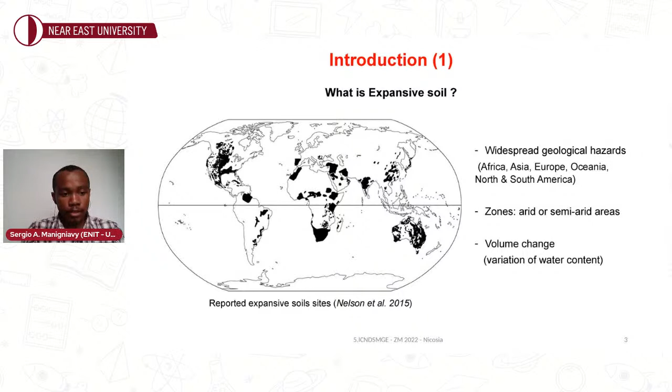Without further ado, what is expansive soil? It is a widespread geological and natural hazard present on six continents across the world. We find this kind of soil in arid or semi-arid areas. Its volume changes with variation in water content, which is defined such that this soil will shrink in a drying environment, and when it is wetting, it will swell.

The way it shrinks is characterized either by human activity or by natural ways, like evapotranspiration, water adsorption, or evaporation. That's why Richard Jones and Holtz called this kind of soil a hidden disaster. The clay mineral responsible for this phenomenon, the shrink-swell behavior, is from the smectite group, in particular montmorillonite. Shrink-swell behavior of soil causes damages,

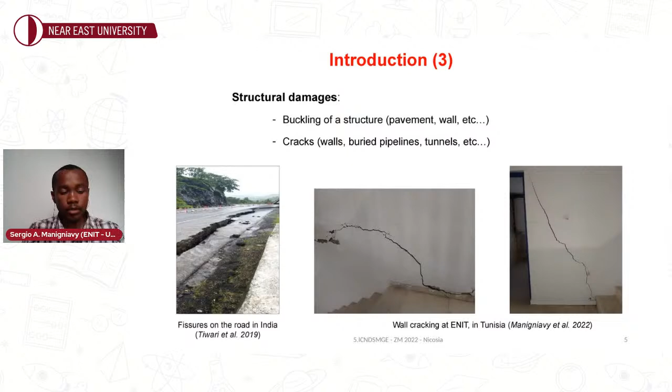such as buckling of structures, walls, pavement, or roads, or railways. It can also present as cracks on roads, or in walls or retaining walls. Damages lead to costs. Annually, the extra costs related to repairing and maintenance are more than $18 billion, and due to all this damage, the lifetime of our structures is reduced.

And that means we don't make a good investment. So we have a question, and us engineers, we should respond to this question: is there a universal method to characterize expansive soil?

I read a lot of papers, literature, and so on. I don't find a universal method. That's why we proposed a characterization method based on oedometer test results, more precisely compression indexes, abbreviated by CC, and swelling indexes CS.

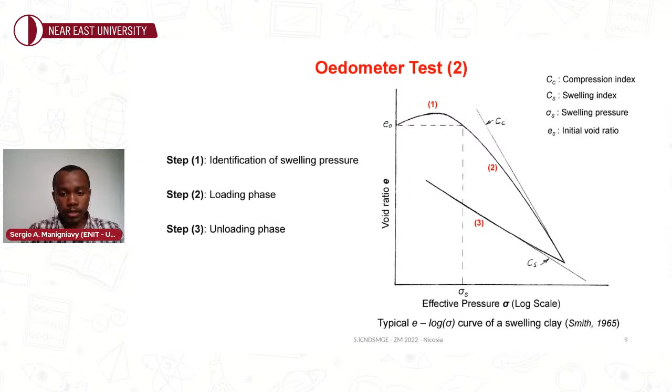we see the slope of the loading phase is the compression index, and the slope of the unloading phase is the swelling index. The point corresponding to the initial void ratio, where we load it in the loading phase, gives us the swelling pressure. That way, we characterize our expansive soil using the CC to CS ratio.

We have collected 39 data points, which come from North America and North Africa, more precisely from Tunisia, Algeria, United States, and Canada. All of those samples are clay soil. We have 28 samples from Tunisia, 5 each from Canada and Algeria, and 1 from USA.

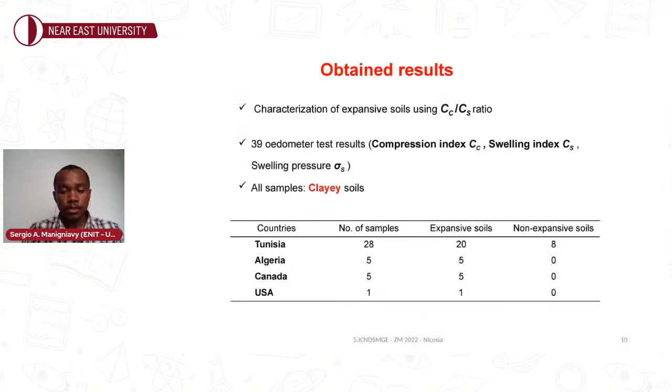And 8 of them are non-expansive clay, only 8. We obtained this graph. We observe that for the non-expansive soil, there are in that zone where CC to CS is higher than 10. And for CC to CS higher than 15, we observe that the swelling pressures are practically equal to 0. And we remark further, as CC to CS increases, the swelling pressure decreases.

In that zone, all points you find there are expansive soil, like this one. So this method, called CC to CS ratio, is an indicator of volume change, quantifying the degree of compression of soil and its swelling. As I said earlier, when CC to CS is higher than 15, the swelling pressure is practically equal to 0.

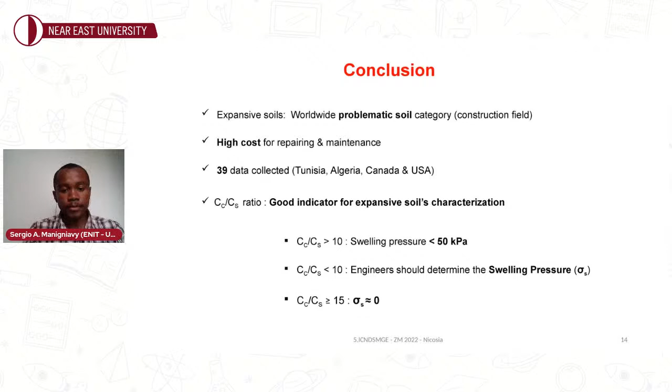When Cc to Cs is higher than 10, the swelling pressure is lower than 50 kilopascal, which is approved by other researchers. And when Cc to Cs is lower than 10, we should not underestimate the swelling pressure of that soil, and we should determine its swelling pressure. When Cc to Cs is higher than or equal to 15, the swelling pressure is practically equal to 0.

Our next step is to collect a lot more data to confirm this finding method, the Cc to Cs ratio, and also to refine the degree of swelling potential. With a large amount of data from across the world, we can establish a curve fit to determine or predict swelling pressure for clay soil. I don't mean all soil, I mean all clay soil.

The next and final step of our study is to optimize our mitigation method, which is the use of granular material as an interface between our foundation and the swelling soil. Thank you for your attention. If you have a question, the floor is yours.

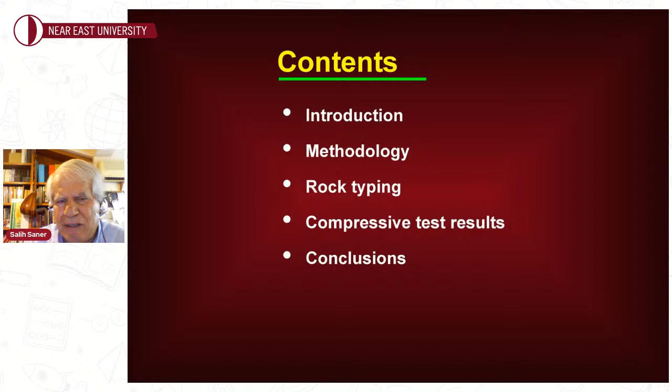Not only in Cyprus, but in many Mediterranean countries, these rocks of Miocene age are available and being used. The building was built by the British colonial administration in 1937, and it was burned out and collapsed in 1974 after a fire. The rock is called commercially sarı taş, which means yellow stone.

It is yellow, as you see. And everywhere, even engineers, always — it's bothering me — engineers are calling it sandstone, sandstone, sandstone. It is not sandstone. Yes, it is made of sand-sized particles cemented with calcium carbonate, but it is limestone. This is one issue I wanted to highlight for everybody. It is limestone. In geology, we have to respect other sciences.

It is limestone, granular limestone, also called calcarenite due to its grain size. If the grains are sand-sized, we call it calcarenite, a grainy stone—this terminology is commonly used. We have many castles, towers, and the walls surrounding Famagusta and Nicosia, Lefkosia, and many historical buildings made of this stone.

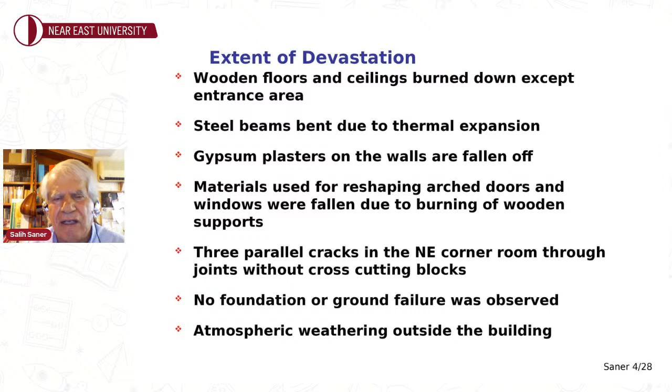We saw three parallel cracks only in the entire building, and no failure in the foundation and ground. We also saw some alteration in the rocks.

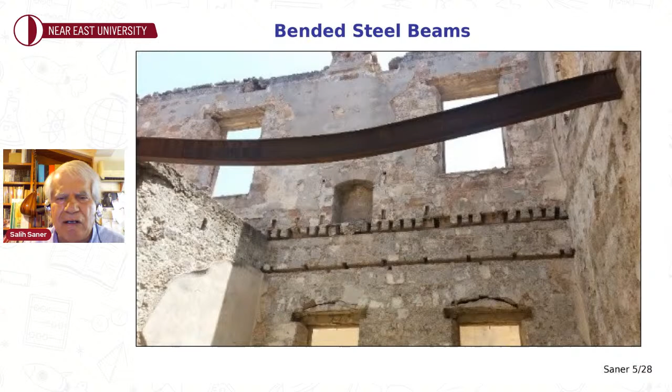Now this is the view of the inside. You see the rocks—they seem very strong, the beam is bent, and there are fractures, but they don't cross-cut the blocks. They go through the joints between rocks.

Originally there were arches at the top of the doors and windows, but in a renovation stage they made it rectangular, canceling the arch, so that material was supported by wooden supports. Those supports also burned out—but look at how beautiful the rock is.

Rectangular blocks are used outside the building as decorative material, and nothing happened to them—they are perfectly preserved as original.

In the southern front of the building, 75 to 80 centimeters up from the bottom section, the yellow stones are altered—we have alteration, atmospheric alteration, weathering.

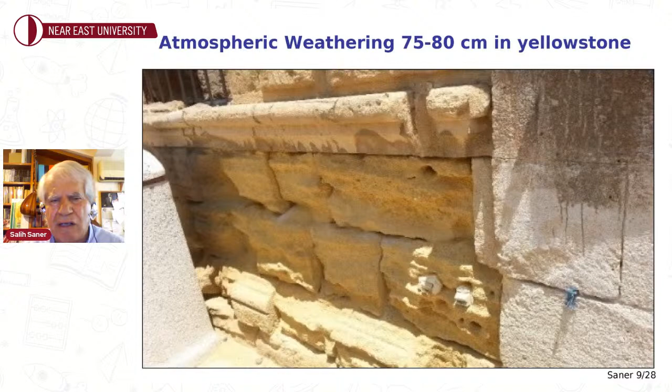We asked what the differences are between the rocks used that may mainly affect their strength today. After our study, we took 40 samples and divided them into three groups.

One is homogeneous yellow stone, calcarenite; another is fine-grained; and another is coarse-grained, granular, with smaller grains than the first granular type. The third one has big grains leached out and dissolved, so we call this one vuggy.

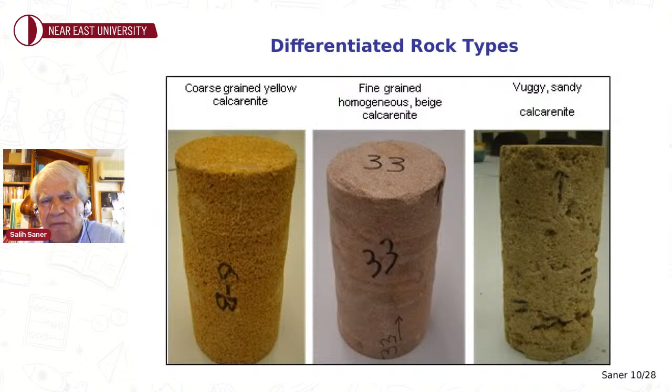So in the same building, and these materials are also used in building the walls surrounding the cities. This is the vuggy sandy sample—three different facies.

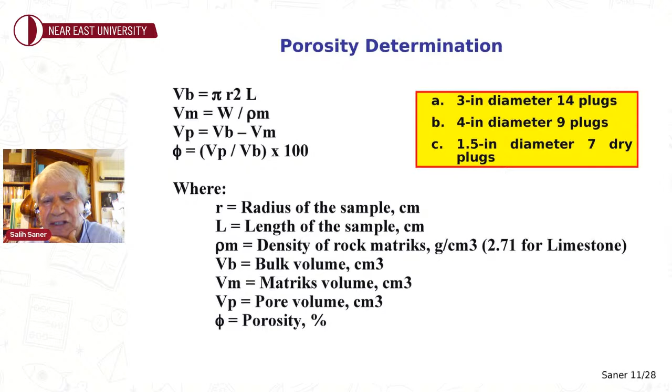When we got the samples, we determined porosity. Since it is made of 100% limestone using 2.71 matrix density, we calculated porosities in all samples.

We used a machine to run uniaxial compression tests, and after that we took the results.

So we have fine-grained, coarse-grained, and vuggy—three different porosities. The porosities are given with average, maximum, and minimum values.

The average porosity, as you see here, is 37%, very high. The maximum goes up to 50% across all the rocks, and the highest is in the coarse type.

37% for vuggy, and for coarse samples 43%, fine-grained 27%. The corresponding compressive strengths are: this one is 11, this is 4, and this one is 4.15. The lowest is vuggy, on average.

For the groups, we checked fine-grained, coarse-grained, vuggy, and overall results. We found that vuggy has the lowest strength, and fine calcarenite has the highest strength.

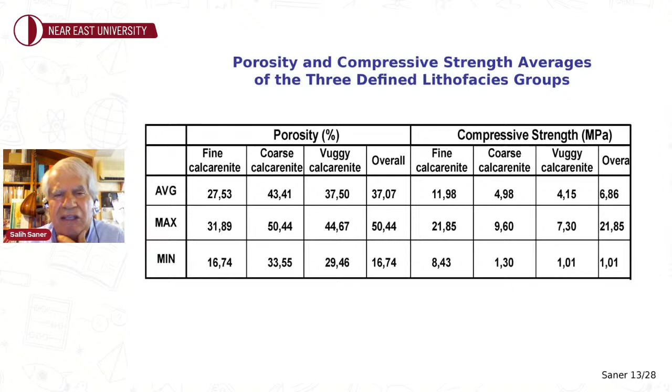So when selecting the rock, we can determine which one is better for construction. After that, we asked: is it strong enough today or not? We try to interpret it.

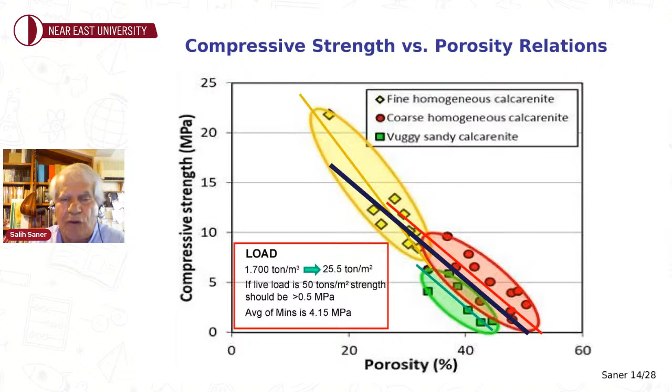Of course, first we have to observe, then interpret, and then do whatever is needed.

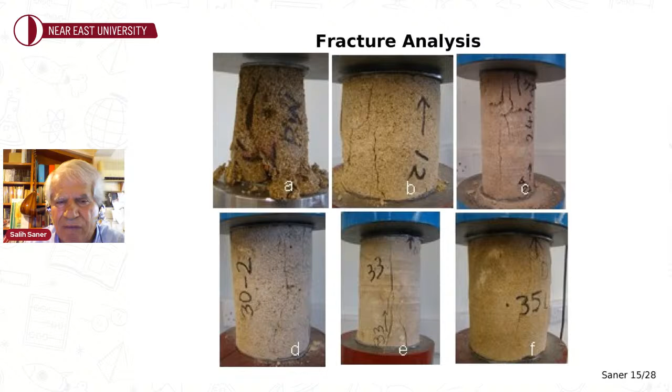We also checked fracture types—what kind of fractures are happening. This one is the granular, calcarenite, homogeneous one—you see it disintegrates under pressure. This one shows longitudinal fractures, and we are getting much better fractures here. So the brittle ones, the fine-grained ones, are more brittle with longitudinal fractures.

And I wanted to highlight the importance of rock type in rock mechanics and put the observations for everybody here. What I mean is, we have to care about the mineralogy also when we are doing this kind of work. This is what I want to say.

Thank you very much, Professor Saner, for your nice presentation. I was wondering if you have any data about the weathering process, like when they are exposed to some weathering factors. Is there any information about their properties some years ago versus their current properties, so that we can see the effect of weathering, if such data is available?

When they were built in 1937, they were perfectly cut. This is not only in this building, but many buildings made from this kind of rock have a weathering effect, with cavities occurring outside. This one was built in 1937, and today you are seeing the surface and our observations. This is at the lowest part, the 75 centimeter part, and why it is not available in the other corners, only in the southern wall, we wanted to interpret it.

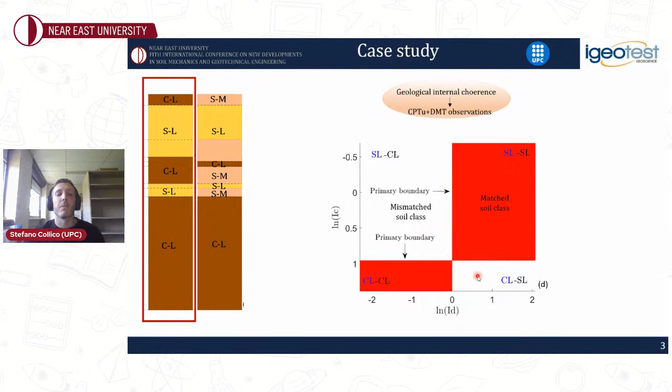So where we have a disagreement between CPTU classification and DMT classification, after having defined this joint chart, we also need to treat a little bit the DMT data, since the amount of data that we collect during a CPT test or during a DMT test is rather different.

I will not enter into the detail - there are several approaches to do that. I will just present this case, in which we are considering a spline interpolation of the DMT data, not just in order to have the same amount of data as CPT.

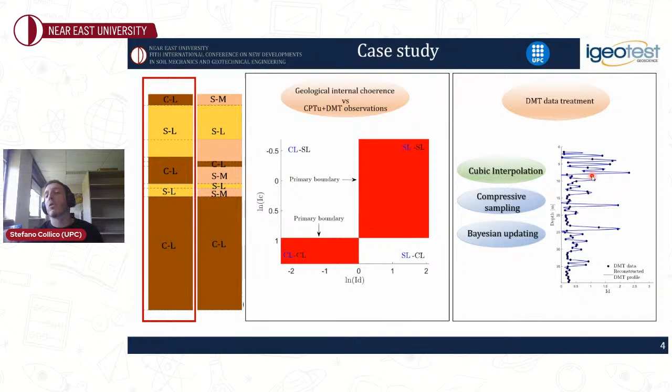So having defined all these tools, we can now check the coherence of a geological interpretation. We plot for each soil geological layer the CPTU and DMT data. As you can see, for the clay-like unit, reported by 1, 3, and 5 in terms of CPT and DMT data, there is a sort of coherence with respect to geological description, since all the data fall within the matched clay-like class.

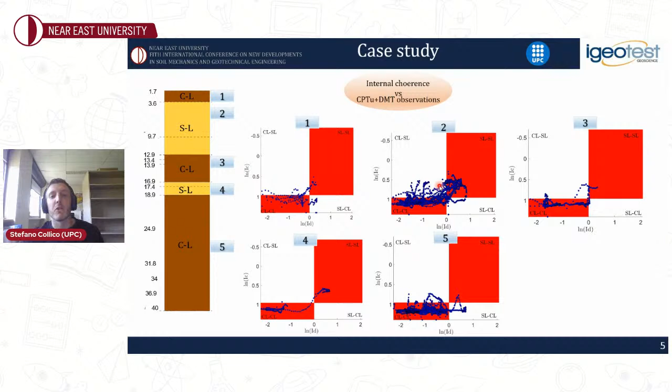On the other hand, if you analyze the CPTU and DMT data for the sand-like unit, you can see that, especially for this layer number 2, the data spread across the soil behavior type chart. So the question that arises is quite spontaneous.

How can we communicate this layer delineation to other parties involved in the design process? How can we justify the fact that we are neglecting, for instance, clay layers within this sand-like unit? How can we justify that we are considering only a soil unit while CPT and DMT data spread across all around the soil behavior type chart? And how can we justify, for instance, the fact that we are not considering soil mixture class in the classification?

So to answer that, we propose a probabilistic tool that aims to simplify the soil delineation task, in particular to facilitate the communication, the process of layer delineation. We propose a tool that has as an output the CPT and DMT-based soil profiling while assessing soil inherent variability and measurement errors, in which the classification refinement is specified by the analyst and thin layers are assessed.

So in order to do that, first of all, we need a statistical model to describe the CPT and DMT data. So let's consider this synthetic IC and ID profile. If we plot this data in the joint soil behavior type chart, you can see that there is some scatter due to inherent variability, measurement error, and model error.

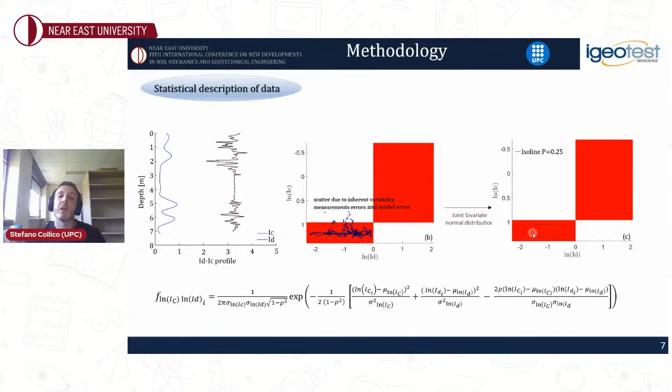And our assumption was rather simple. We modeled this data by a joint bivariate normal distribution, which is defined by the mean value, and by a covariance matrix, which defines the linear codependence between IC and ID.

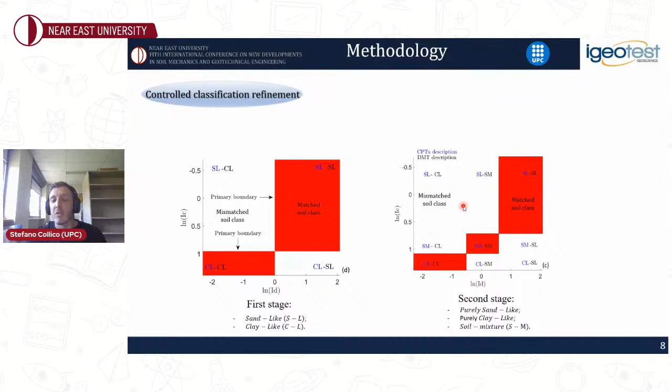We then introduce a controlled classification refinement in which the analyst can, for instance, select level 1, that basically is the one that identifies matched sand-like and clay-like classes in addition to mismatched soil classes, or level 2, in which in addition to sand-like and clay-like matched soil classes, a soil mixture 1 is identified. And in addition, 6 other mismatched soil classes are also identified for this level of refinement.

So we have then to introduce the parameter in order to identify a layer, and we introduce 2 user-specified parameters. The first one is the noise threshold parameter P, that basically allows for extreme value of CPTU data due to, for instance, noise or some shell within the layer.

And allows for extreme value of DMT data due to, for instance, the bad interpolation model that we are using. So basically this P parameter consists of selecting the isoline of the bivariate that fits the data. If the analyst selects a high value of P, basically selecting an isoline that is close to the mean value of the bivariate distribution, it is sort of neglecting all the inherent variability and measurement error. While if the analyst selects a low value of P, in this case it is giving more importance to the inherent variability and the data outliers.

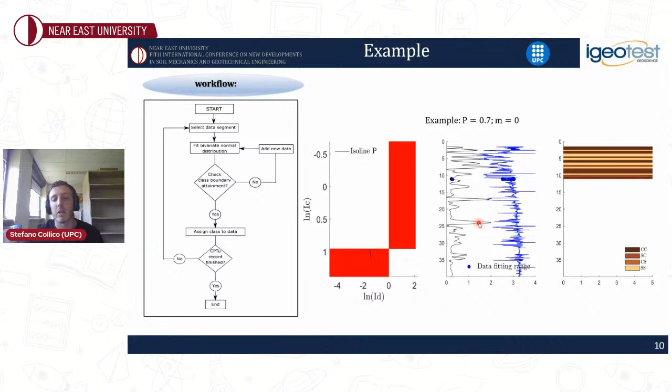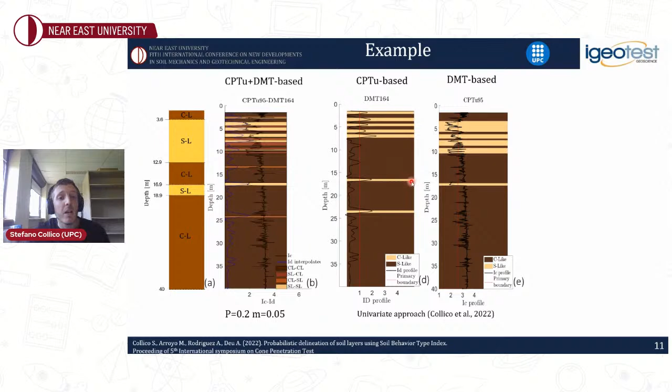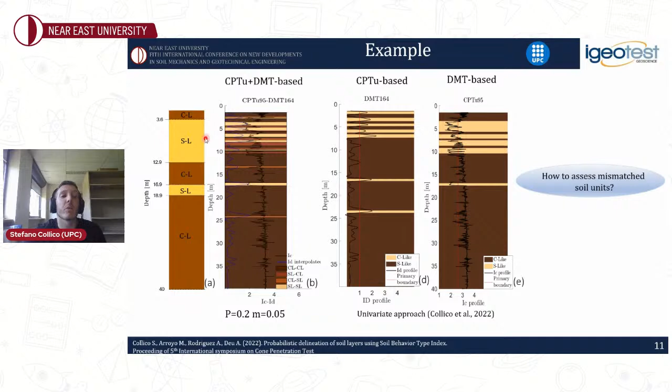This is quite logical, because if we observe the CPTU-based and DMT-based soil profile, we can see that there is a lot of discrepancy between DMT and CPT-based classification, especially within the first 15 meters. So basically what we want to answer is how can we assess these mismatched soil units so that the output soil profiling is coherent with the geological description, just in terms of clay-like and sand-like unit.

In order to do that, we introduce a simple bias factor that basically represents the ratio of the posterior probability of the soil unit classified conditional to CPT observation over the posterior probability of the soil unit classified conditional to DMT observation. So if B is greater than 1, the identified soil unit will be classified according to the CPTU classification system. If B is lower than 1, the soil unit identified will be classified according to the DMT classification system.

I will not enter into the detail, but it is important to note that this Bayesian procedure allows us to integrate and express the analyst's belief about CPTU and DMT data on soil unit identification.

For instance, let's say always at level 1, consider always the soil profiling output for P equal to 0.2 and M equal to 0.05. If the analyst thinks that the CPTU classification, the soil profiling from the CPTU, is more trustable than the DMT one because the CPTU provides more information in terms of data, in this case we can assign a prior knowledge of soil unit classified according to the cone penetration test classification system that is higher with respect to the DMT one, and we obtain this soil profiling.

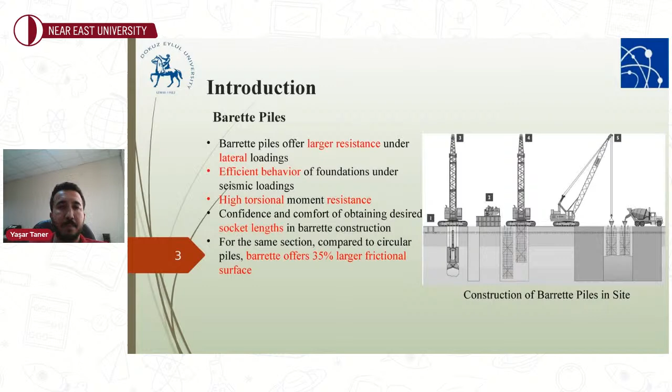In this study, findings of finite element-based research will be presented regarding the influence of loading direction, pile spacing, and the position of a pile in the group on pile-soil-pile interaction. Piles are modeled as volume elements in the finite elements model to study shape effects appropriately. The soil is assumed as elastic, and the three-dimensional nature of the problem necessitated the establishment of 3D numerical analysis models.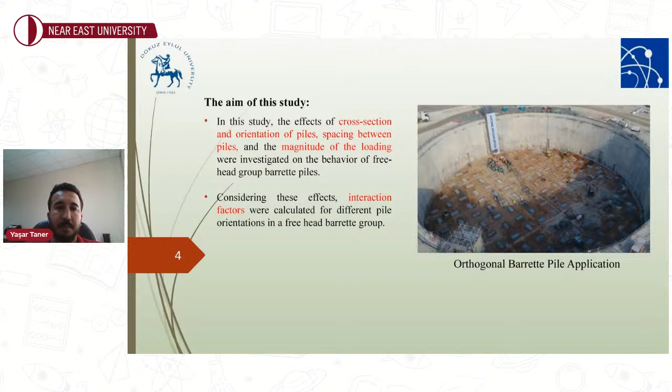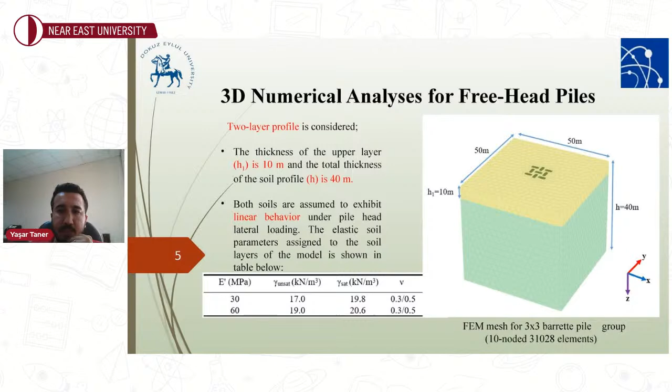In numerical analysis, a two-layer profile is considered for barrette piles, where the stiffness of the upper layer was half that of the bottom layer. The thickness of the upper layer H1 is 10 meters, and the total thickness of the soil profile H is 40 meters. Both soils are assumed to exhibit linear behavior under pile head lateral loading. The elastic soil parameters assigned to the soil layers of the model are shown in the table. The bottom layer is stiffer than the upper layer, with 60 megapascal elastic modulus.

Pile groups consisted of 3x3 piles. The finite element model comprises 10-noded wedge elements to discretize the volume piles and the soil profile. The aspect ratio of the pile cross section is set as L over B equal to 3.5, where L and B stand for length and width of the pile section respectively. The orthogonal distance S between any two consecutive piles changes in direct proportion to the plan width of the pile. Each pile is horizontally loaded at the head in both X and Y directions.

Here you can see the calculation methods of the interaction factors according to Poulos. Poulos' theory is based on some assumptions. First, the pile is assumed to be a thin rectangular vertical strip of width D and length L with a constant flexibility. It's also assumed that the pile and soil are fully compatible, ignoring the relative motion of the pile and soil. The soil is assumed to be elastic, and the interaction factor alpha is defined as the ratio of lateral displacements of the receiver pile to the source pile, as shown here.

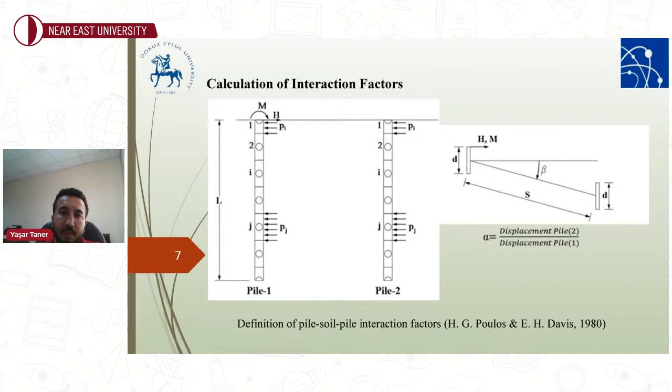In this slide, we see loading patterns. The source piles were loaded by means of lateral surface traction at the pile heads with a magnitude of 100 kilopascals for an 80 by 280 barrette pile. Interaction factors are determined depending on pile orientation for rectangular cross sections, since loading the piles along their strong or weak axis will generate different effects on adjacent piles. Two cases were analyzed, as shown with Case 1 and Case 2.

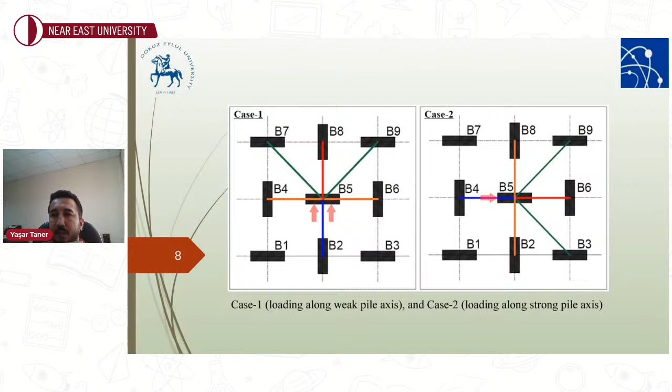The source and receiver piles in similar positions with respect to loading direction are linked to the source pile with the same color. For example, source pile B5 and leading pile B8 are linked with red color in Case 1, and also source pile B5 and B6 are linked with red color in Case 2.

In Case 1 and Case 2, the source piles interact with each neighboring pile, and the amount of interaction varies depending on the position of each receiver pile. The piles are clustered as leading, trailing, and side piles with respect to the central one, B5, on which the load is applied. Analysis revealed that the location and orientation of the receiver pile with respect to the source played an essential role on the lateral interaction factors.

It may be seen in the figure also that the interaction factor between B5 and B8, case 1, is lower than that between B5 and B6, which is case 2.

It was found that whether the major axis of the receiver pile was parallel or perpendicular to the load direction made the largest difference in pile response. While investigating the influence of pile position, it was noticed that piles diagonal and adjacent or behind the source exhibit much lower interaction factors. Poisson's ratio had a slight effect on the results also.

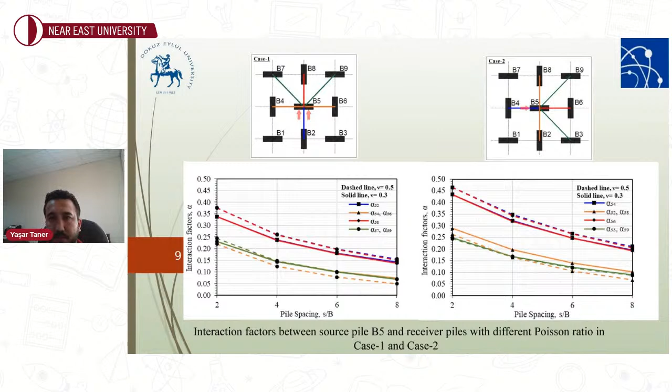It has been stated above that the interaction between the barrette piles varies according to position of the pile just in front of the loaded pile. It's clear from both cases that the receiver pile loaded along the weak axis yielded lower interaction factors.

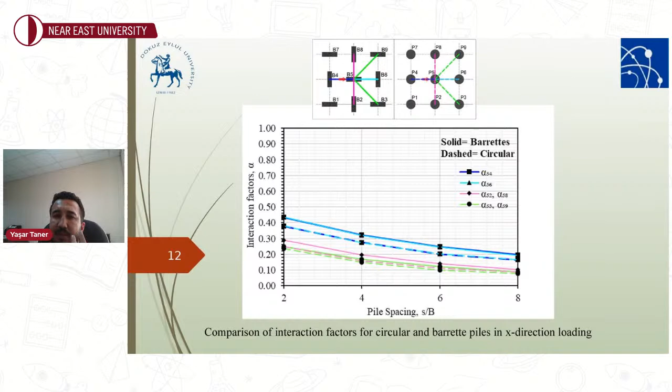Another aspect of the barrette and circular pile group comparison is that the flexibility matrix is no longer symmetric for barrette piles, whereas it's the opposite for circular piles. It may be concluded that what matters in elastic three-dimensional pile group analysis is the relative stiffness between the source and the receiver pile.

As a conclusion, the pile that resists the loading with its stronger axis greatly affects the value of the interaction factor. Pile orientation in a group is one of the critical factors for pile-soil-pile interaction. Comparing the response of circular and barrette piles, groups with rectangular pile sections behave quite differently than circular piles.

The stiffness matrix becomes asymmetric due to the pile orientation. Circular piles in a group, on the other hand, always yield a symmetric stiffness matrix for elastic soil conditions. It's believed that the findings of this elastic finite element analysis shed light on further non-symmetric pile response in a group when soil nonlinearity is also accounted for.

Consideration of nonlinear soil response is expected to be quite essential in determining lateral load-deflection curves along the strong and weak axis of the barrette pile. Sectional dimensions of the barrette piles are fixed at L over B equals 3.5 in this research. L over B ratios other than 3.5 may also be studied in future research to gain more insight on the influence of pile flexibility on pile-soil-pile interaction.

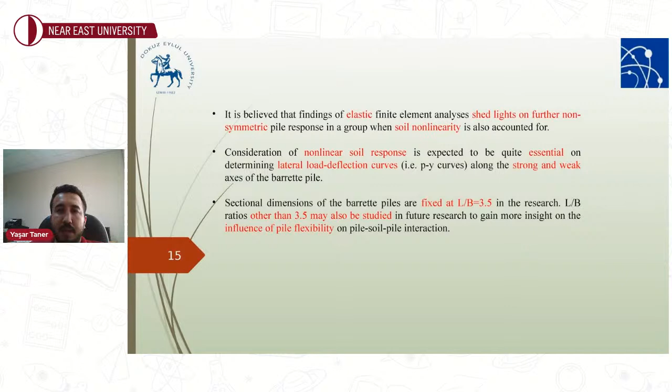Thank you, Mr. Taner, for your nice presentation. I was wondering if you have seen any such studies in the literature about barrette piles similar to yours. I wonder if the results are comparable to other studies or not.

For laterally loaded piles, there are few articles, but there are many studies for axially loaded barrette piles. That's also my master's degree title. Okay, very good. Thank you for your contribution.

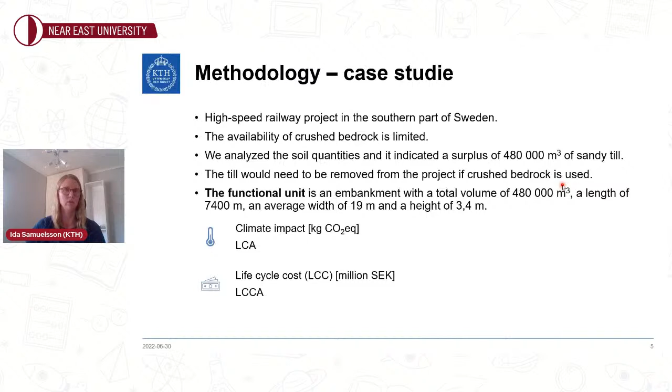There are some standards and guidelines for how to do the assessments. There are 2 ISO standards for life cycle assessment, 1 European standard for construction works, and for the LCC calculations I've used the guidelines from the Swedish Transport Administration.

The assessment is divided into 4 parts. We first had a goal and scope definition, the life cycle inventory analysis, the life cycle impact assessment, and last, the interpretation.

The life cycle stages are often divided into the production stage, which has the raw material supply and the manufacturing. You have the construction stage, the use stage, the end of life stage with the demolition, and hopefully a recycle stage.

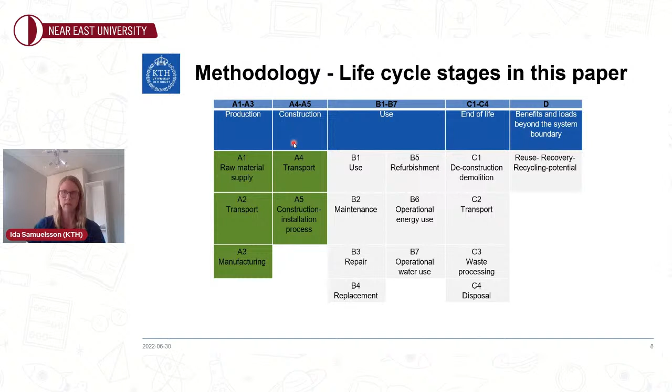The second part was the system boundary that you have to decide. For the crushed bedrock method, the production stage is the crushed bedrock production. You transport it to the construction site, fill it in an embankment, and compact it. The extra till that is not needed needs to be excavated and transported to a landfill.

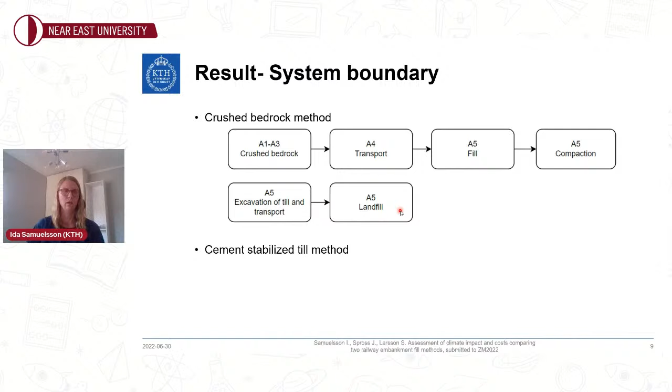For the cement stabilized till method, the production stage is the cement production, transportation of the cement to the site, excavate and fill the till, and then stabilizing the till with the cement.

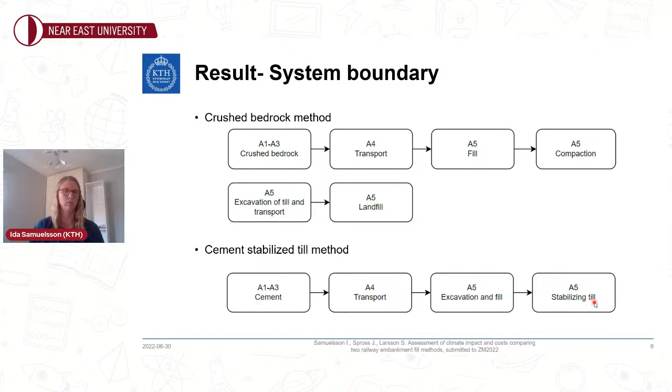I found the data from databases such as the Swedish Transport Administration's database Klimatkalkyl and Geokalkyl, they are Swedish names, and also from experts and from EPDs, that is environmental product declarations.

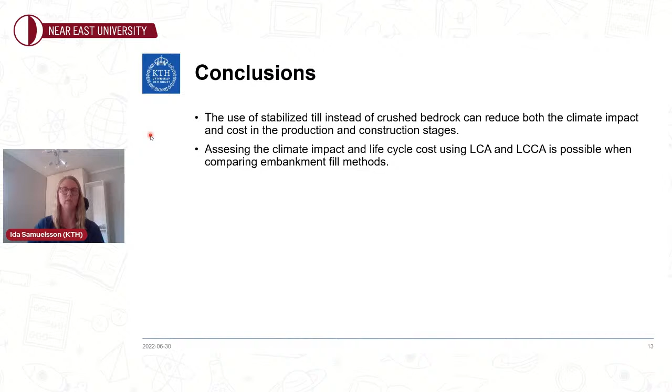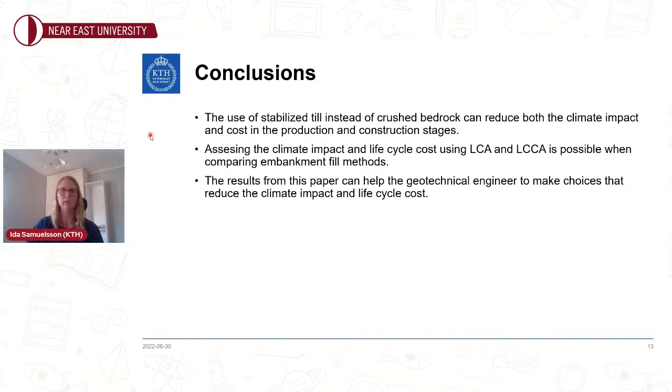Conclusions: the use of stabilized till instead of crushed bedrock can reduce both the climate impact and cost in the production and construction stages. Assessing the climate impact and life cycle cost using LCA and LCCA is possible when comparing embankment fill methods. The results from this paper can help the geotechnical engineer make choices that reduce the climate impact and life cycle cost.

Thank you very much for your attention.

Thank you, Ms. Ida Samuelsson. Very interesting presentation. We will be more interested in life cycle cost assessment in our projects, so this will give guidance to geotechnical engineers. Thank you for your presentation.

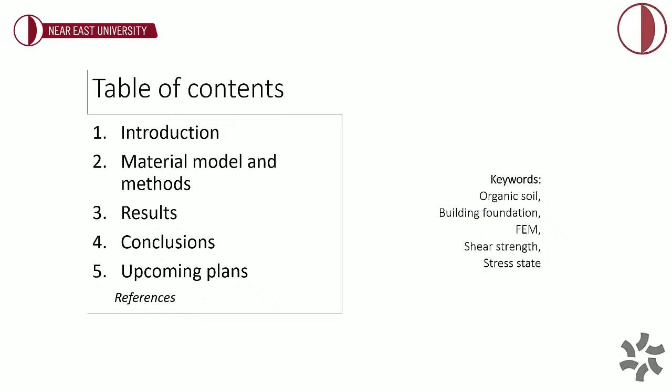The topic of this bigger project is the geoengineering properties of selected peats. We have 3 stages. The first is the field stage, where we would like to do site investigations, collect samples, and perform electrical resistivity tomography cross-sections. In the second, the laboratory stage, we would like to focus on strength properties, elastic properties with creep analysis, and filtration properties. Here we would also like to get an answer to the question about the isolation properties of the peat: is the peat more an aquifer or aquitard soil?

In the third stage, we would like to do numerical modeling, focusing on limit load, immediate and long-term settlement, as well as slope stability and water infiltration issues. All results from all these stages would be implemented to get the final objective, which is applications in the area analysis of selected regions.

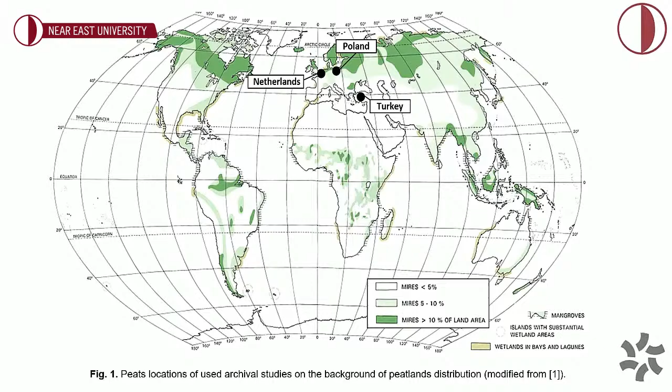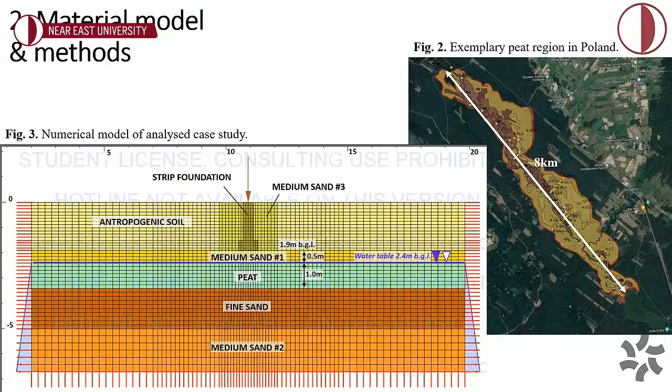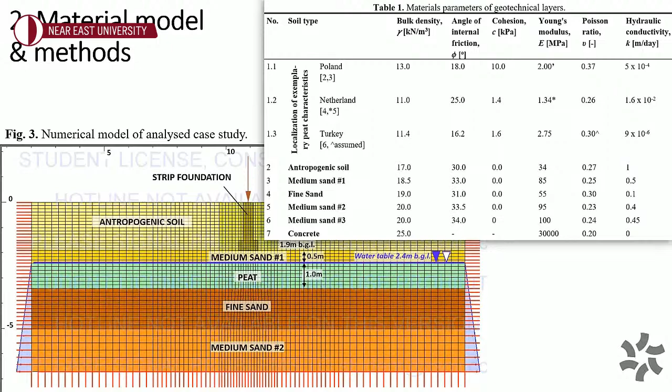What is important is that the values of all these parameters are very variable, which makes the results very unpredictable. The range of the results is very hard to predict. What's more, we have conducted triaxial investigations of filtration, and we got results showing that the hydraulic conductivity changes as a function of the isotropic effective stress. So we can say that at different depths of peat, it will have different characteristics of filtration.

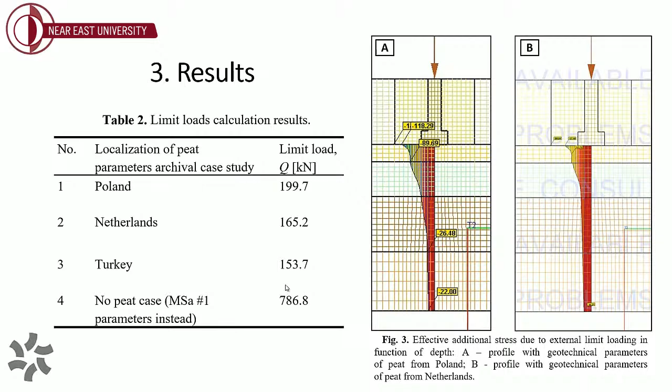On the right side of this page, we can see also the effective additional stress due to external limit loading in function of depth. In A, we can see the profile for the case of the peat from Poland. In B, we can see the case of peats from the Netherlands. The values are different because the limit loads are different, but still the shape of these curves is similar.

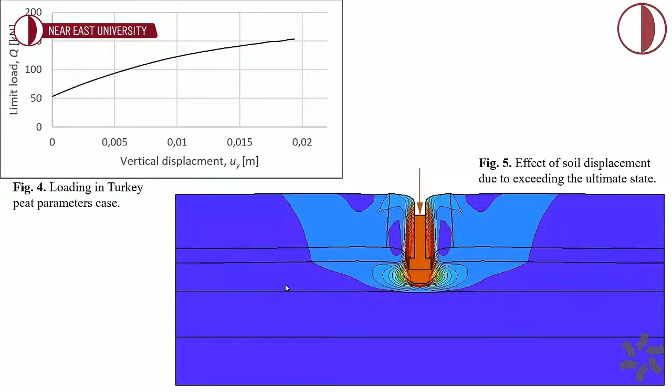From the right side, in figure number 5, we can see the effect of soil displacement due to exceeding the ultimate state. We can see that the peat, as a sensitive soil for stress, shows a displacement range that is much higher than in the case of the sandy layers.

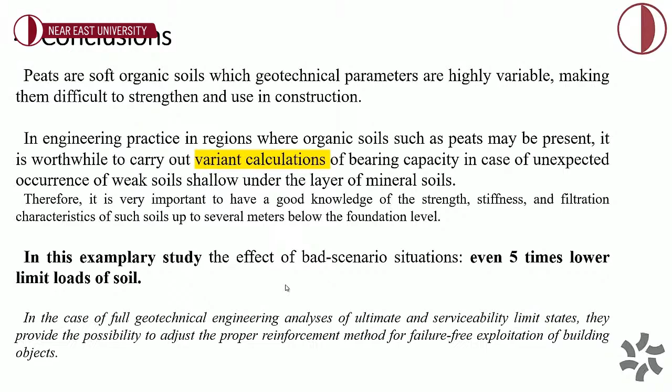A few words about upcoming plans. In the closest 1 month, we would like to go to the field and take new samples to perform the lab stage, and then a numerical model to implement the results from the lab stage. We would also like to get information about groundwater level measurements as well as electrical resistivity tomography cross sections.

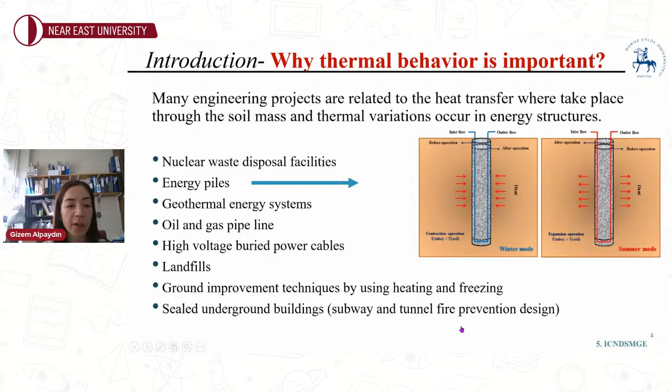There has been a tendency to use energy sources because of insufficient resources and increasing demand for energy. Here you can see some energy geostructures such as nuclear waste disposal facilities, energy piles, geothermal energy systems, oil and gas pipelines, and high voltage buried power cables. These energy structures are in contact with the surrounding soil and cause temperature changes in the soil, which is why thermal behavior is very important.

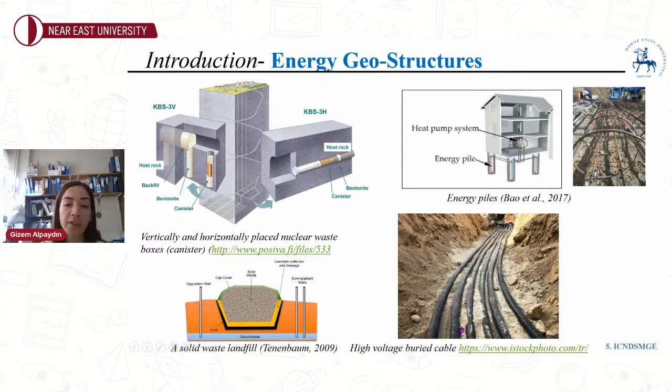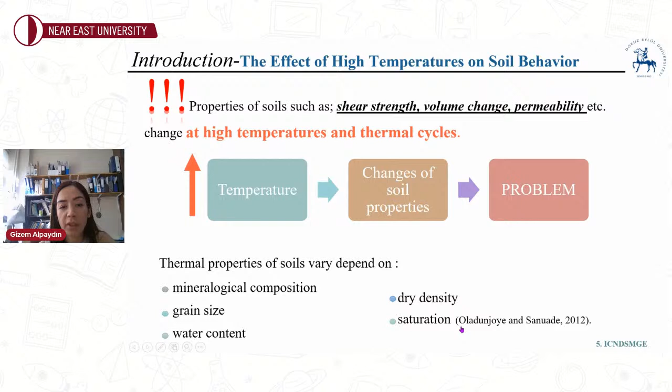Nuclear wastes are covered by bentonite or sand bentonite mixtures as a buffer, because these mixtures have low hydraulic conductivity and high swelling capacity and retention properties. So we used sand bentonite mixtures in our study. According to previous studies, properties of such soils, such as shear strength, volume change, and hydraulic conductivity, change under high temperatures, and changing these parameters causes serious problems.

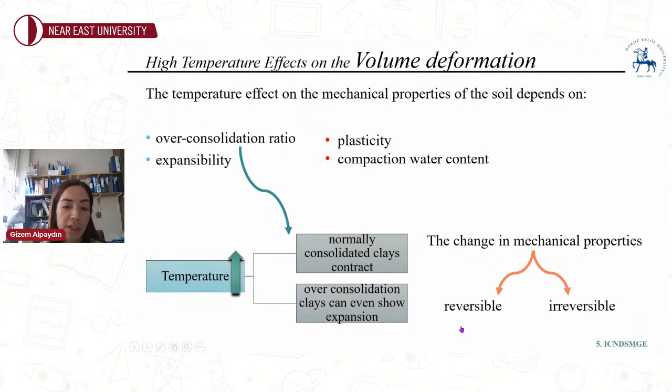How the temperature increment will affect the soil depends on many characteristics of the soil, for example over-consolidation ratio, plasticity, expansibility, and compaction water content. In addition, as temperature increases, normally consolidated clays contract, while over-consolidated clays may expand. Here, contraction means deterioration of the clay skeleton and expulsion of water. Expansion means thermal expansion of the pore water, so the soil skeleton swells with increasing temperature.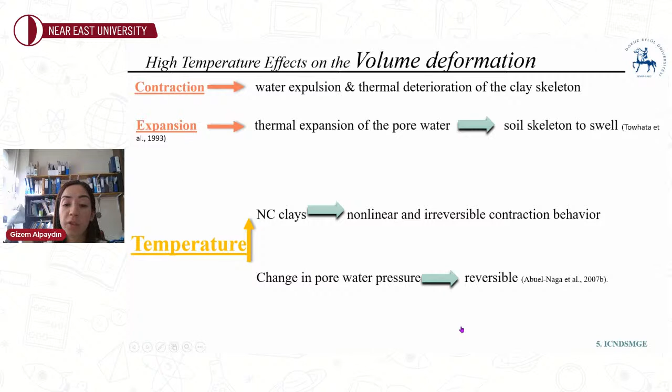Volumetric deformation of soils may cause damage around energy geostructures. For that reason, additives can be added to buffer materials, and we used boron mineral as an additive in our study. What is boron? Boron is not free in nature, it is present as minerals such as colemanite, ulexite, and tincal. The most critical boron reserves are in Turkey, Russia, and the USA.

So why was boron chosen for this study? Boron is used in many application areas like energy and metallurgy. Its favorable properties include low thermal expansion and being a neutron absorbing material. The objective of this study is to investigate the compressibility behavior of ulexite-added sand bentonite mixtures under thermal cycles. One of the most common types of boron minerals in our country is ulexite.

Here is the picture and chemical formula of this mineral, which contains both calcium and sodium. The physicochemical properties used in this study are shown in the table. As shown, bentonite has a very high liquid limit, and ulexite's liquid limit is not too high compared to other materials. Also, the specific gravity of ulexite is lower than sand and bentonite.

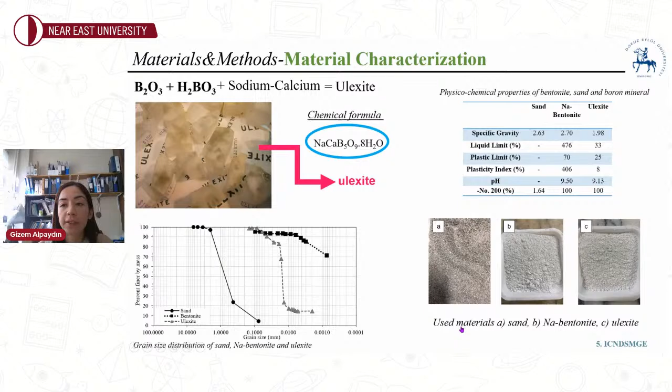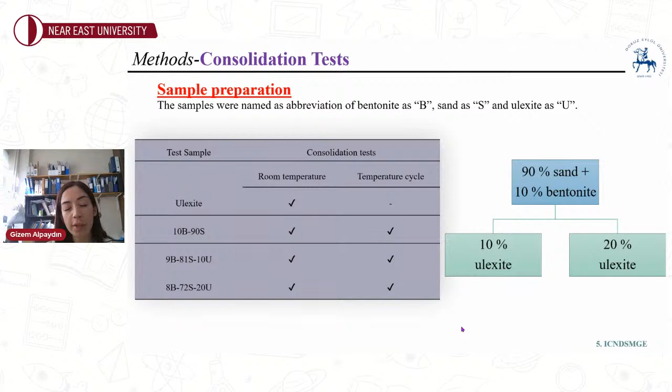In this study, the test setup and percentage of materials in the mixture are shown in a table. The samples were named with abbreviations: bentonite as B, sand as S, and ulexite as U. For example, the 9B81S10U sample contains 9% bentonite, 81% sand, and 10% ulexite. While preparing the mixture, 10 or 20% of the total dry mixture was taken as ulexite, and the remaining part was 10% bentonite and 90% sand.

In addition, in our study, the samples were compacted at the 2% wet side of the optimum water content, and consolidation tests were conducted under room temperature and temperature cycle. Before thermal cycle applying, the tests were conducted up to the vertical stress of 196 kPa, and the compression was completed under this stress level.

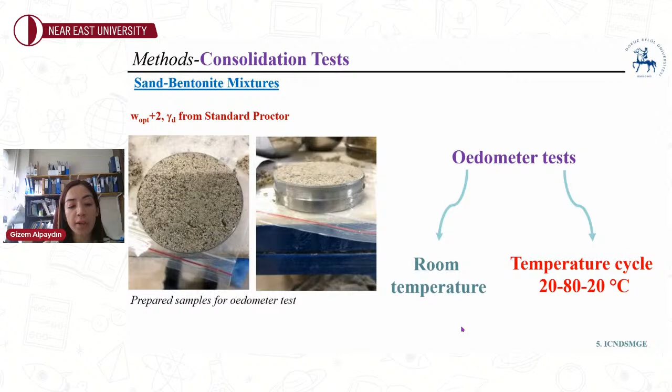The temperature was increased to 80 Celsius degrees. After that, as soon as test reached equilibrium for deformation, temperature was decreased back to room temperature.

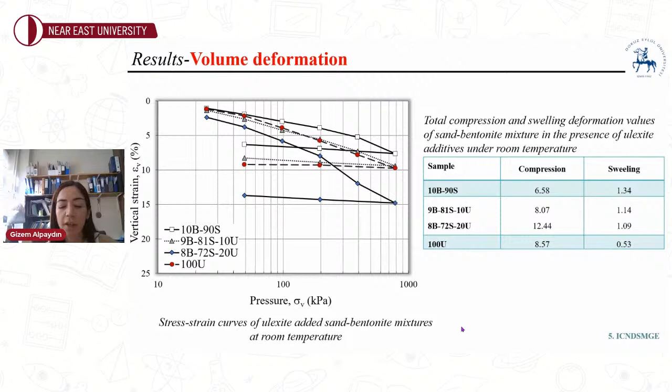Here is the results. When we look at the test results, we saw that the amount of compression increased and swelling amounts decreased with ulexite addition. For example, as seen in table, the compression amount of the additive-free sand bentonite mixture increased from 6.6 to 12.4%. And here you can see unloading, loading, unloading curves of all mixtures under thermal cycles.

To remember, here you can also see the room temperature graph from the previous slides. Samples did not show significant deformation under thermal cycling. However, this low deformation was permanent. This is clear from deformation occurred under 80 Celsius degree was not reversed by reducing the temperature. However, for the unloading stage, the deformation at high temperature was generally reversed by decreasing the temperature.

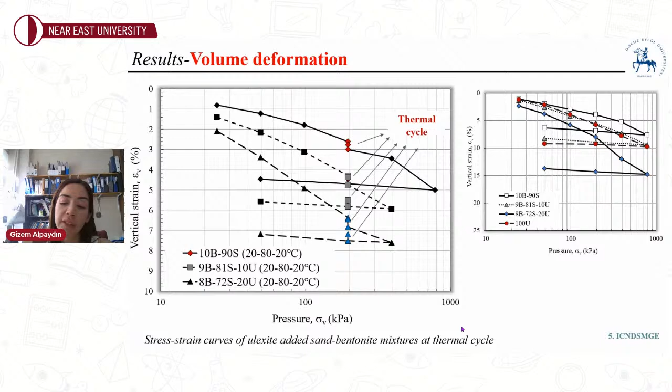Here, compression, swelling, deformation of mixtures under thermal cycle in detail. Due to experimental conditions, the loading of the additive-free mixture was conducted up to 785 kPa, and the mixtures with additive up to 392 kPa.

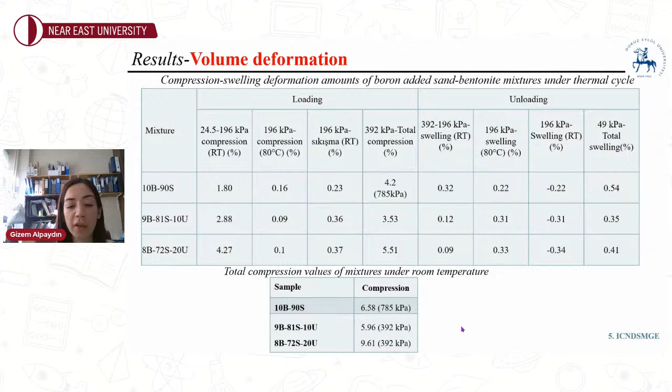Therefore, the total compression amounts were compared under the same loading stages, and we saw that the total compression amounts of all samples decreased with the thermal cycle. For example, the compression amount of the mixture with 20% ulexite at room temperature was reduced by about half when thermal cycling was applied.

When we conclude up the general, the compression of sand bentonite mixture increased with the addition of ulexite under both thermal condition, and total compression of all mixtures decreased under thermal cycles compared to room temperature. In addition, high temperature caused irreversible contraction deformation. However, for the swelling stage, the deformation at high temperature was generally reversed by decreasing temperature.

Thank you for your attention.

This was an interesting talk. Where in practice we may have these problems on thermal cycles on these materials. Do you have any idea about the applications in the field?

I'm sorry, can you repeat? In the field, in practice, where we may need this information, thermal cycles on ulexite added sand bentonite mixtures. Are there any applications, I was wondering, in practice? Of course, sand bentonite and bentonite mixtures used for energy piles or buffer materials.